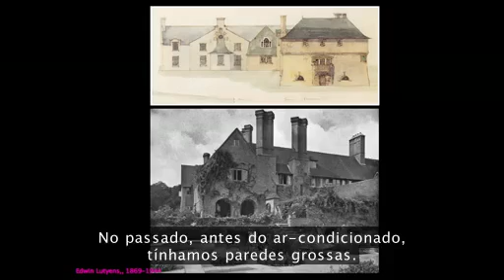In the past, before air conditioning, we had thick walls. The thick walls are great for insulation. It keeps the interior very cool during the summertime and warm during the wintertime. And the small windows were also very good because it limited the amount of temperature transfer between the interior and exterior.

Then in about the 1930s, with the advent of plate glass, rolled steel, and mass production, we were able to make floor-to-ceiling windows and unobstructed views, and with that came the irreversible reliance on mechanical air conditioning to cool our solar-heated spaces. Over time, the buildings got taller and bigger, our engineering even better, so that the mechanical systems were massive. They require a huge amount of energy.

They give off a lot of heat into the atmosphere, and some of you may understand the heat island effect in cities where the urban areas are much warmer than the adjacent rural areas. But we also have problems that when we lose power, we can't open a window here. And so the buildings are uninhabitable and have to remain vacant until that air conditioning system can start up again.

Even worse, with our intention of trying to make buildings move towards a net zero energy state, we can't do it just by making mechanical systems more and more efficient. We need to look for something else, and we've gotten ourselves a little bit into a rut. So what do we do here? How do we pull ourselves and dig us out of this hole that we've dug?

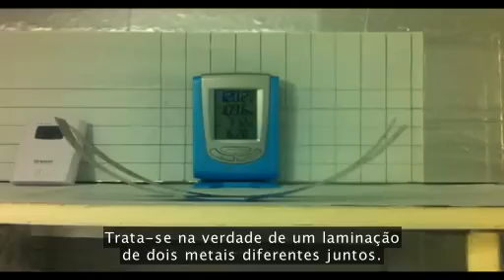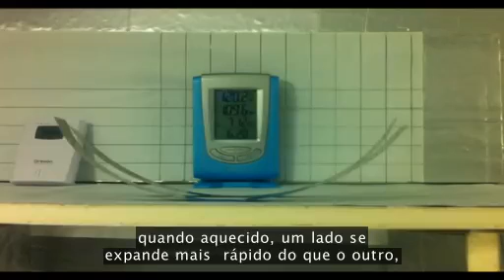First of all, I guess we call it smart because it requires no controls and it requires no energy, and that's a very big deal for architecture. What it is is a lamination of two different metals together. You can see that here by the different reflection on the side. And because it has two different coefficients of expansion, when heated, one side will expand faster than the other and result in a curling action.

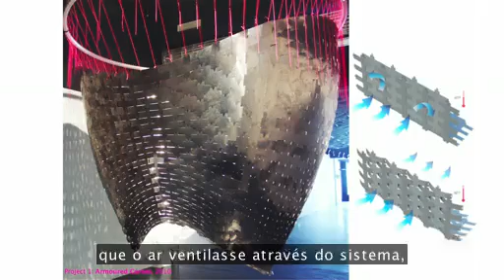So in early prototypes, I built these surfaces to try to see how the curl would react to temperature and possibly allow air to ventilate through the system. And in other prototypes, did surfaces where the multiplicity of having these strips together can try to make bigger movement happen when also heated. And currently have this installation at the Materials and Applications Gallery in Silver Lake, close by, and it's there till August if you want to see it.

It's called Bloom, and the surface is made completely out of thermal bimetal. And its intention is to make this canopy that does two things. One is it's a sun shading device so that when the sun hits the surface, it constricts the amount of sun passing through. And in other areas, it's a ventilating system so that hot trapped air underneath can actually move through and out when necessary.

You can see here in this time-lapse video that as the sun moves across the surface, as well as the shade, each of the tiles move individually. Keep in mind, with the digital technology that we have today, this thing was made out of about 14,000 pieces, and there's no two pieces alike at all. Every single one is different.

And the great thing with that is the fact that we can calibrate each one to be very, very specific to its location, to the angle of the sun, and also how the thing actually curls. So this kind of proof of concept project has a lot of implications to actual future application in architecture.

And in this case, here you see a house that's for a developer in China, and it's actually a 4-story glass box. It's still a glass box because we still want that visual access. But now it's sheathed with this thermal bimetal layer. It's a screen that goes around it, and that layer can actually open and close as that sun moves around on that surface.

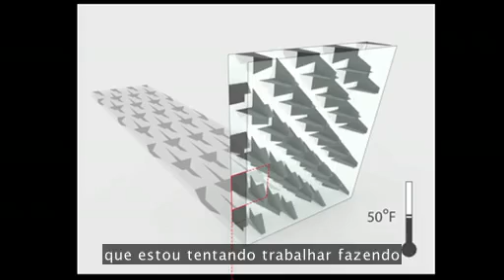I'm also looking at trying to develop some building components for the market. And so here you see a pretty typical double glazed window panel. And in that panel, between those two pieces of glass, that double glazing, I'm trying to work on making a thermal bimetal pattern system so that when the sun hits that outside layer and heats that interior cavity, that thermal bimetal will begin to curl.

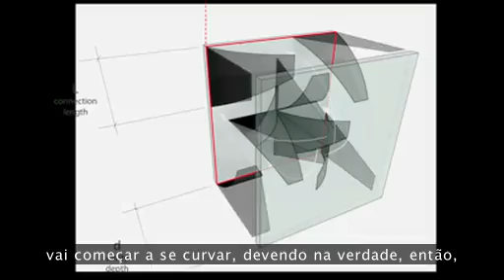And what actually will happen then is it'll start to block out the sun in certain areas of the building, and totally if necessary. And so you can imagine, even in this application, that in a high-rise building where the panel systems go from floor to floor up to 30, 40 floors, the entire surface could be differentiated at different times of day depending on how that sun moves across and hits that surface.

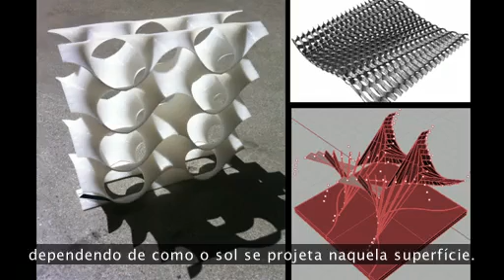And these are some later studies that we're working on right now that are on the boards, where you can see in the bottom right-hand corner with the red, it's actually smaller pieces of thermal bimetal, and we're trying to make it move like cilia or eyelashes.

This last project is also a component. One of my spheres of influence is biology, and this is from the grasshopper. Grasshoppers have a different kind of breathing system. They breathe through holes in their sides called spiracles. And they bring the air through, and it moves through their system to cool them down. And so in this project, I'm trying to look at how we can consider that in architecture too, how we can bring air through holes in the sides of a building.

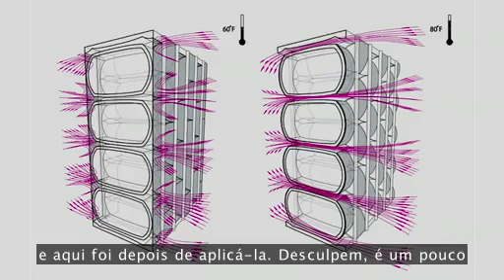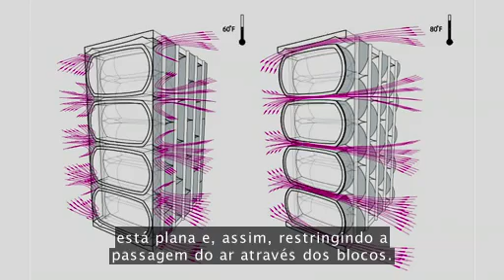And so you see here some early studies of blocks where those holes are actually coming through, and this is before the thermal bimetal is applied. And this is after the bimetal is applied. Sorry, it's a little hard to see, but on the surfaces you can see these red arrows. On the left, it's when it's cold and the thermal bimetal is flat, so it will constrict air from passing through the blocks. And on the right, the thermal bimetal curls and allows that air to pass through.

So those are two different components that I'm working on. And again, it's a completely different thing, because you can imagine that air could potentially be coming through the walls instead of opening windows.

So I want to leave you with one last impression about this kind of work in using smart materials. When you're tired of opening and closing those blinds day after day, when you're on vacation and there's no one there on the weekends to be turning off and on the controls, or when there's a power outage and you have no electricity to rely on, these thermal bimetals will still be working tirelessly, efficiently, and endlessly.